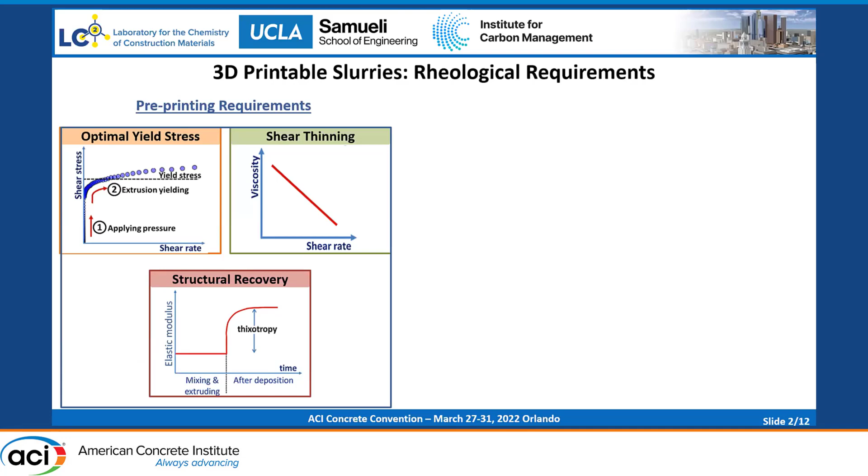So, as you all know, meeting the rheological requirements of a slurry is one of the major challenges in extrusion-based 3D printing. Since most of you are experts in 3D printing, I'm not going into the details of this. Largely, we can categorize the rheological requirements into pre-printing and post-printing rheological requirements. Pre-printing means it should have an optimal yield stress, it should be shear thinning and thixotropic in nature.

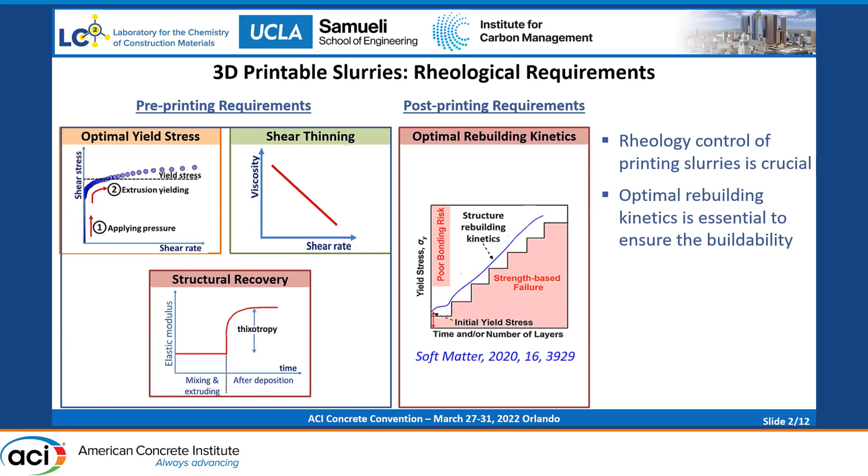When we talk about the post-printing requirements, it is mostly about the post-printing stiffness evolution and how the bottom layers can support the layers that are being printed on top of it. So both this rheological control and the optimal rebuilding kinetics are crucial for a 3D printed structure.

Now, coming to more details of this rebuilding kinetics, this slow fluid to solid transition is the central challenge that we have in concrete 3D printing, and this is what impedes the application of concrete 3D printing for building complex geometries. This limits the printing speed, the print height, the maximum possible overhang, and the print fidelity.

This slow fluid to solid transition greatly restricts the palette of printable geometries, especially the structures with overhang, and limits the achievable architectures. Now, to utilize the opportunities unlocked by 3D printing and by techniques like topology optimization, we need to have slurries with controllable rapid stiffening. When we say rapid stiffening, we're talking about stiffening in terms of seconds or minutes.

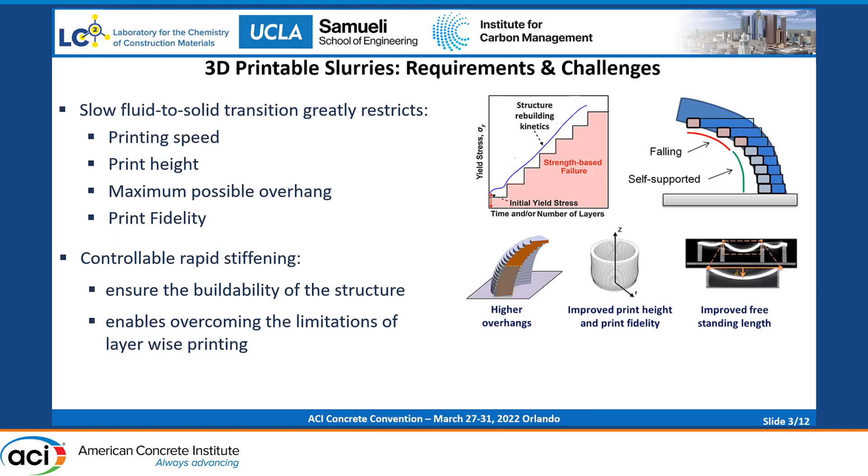So if we have suspensions with controllable rapid stiffening, we'll be able to achieve higher overhangs, improved print height, improved print fidelity, and improved freestanding length. With those kinds of suspensions, we will be able to expand the design and production space that is currently accessible for concrete 3D printing. We'll be able to print lattice structures, stretch-dominated, topology optimized structures, basically structures with high strength to weight ratio.

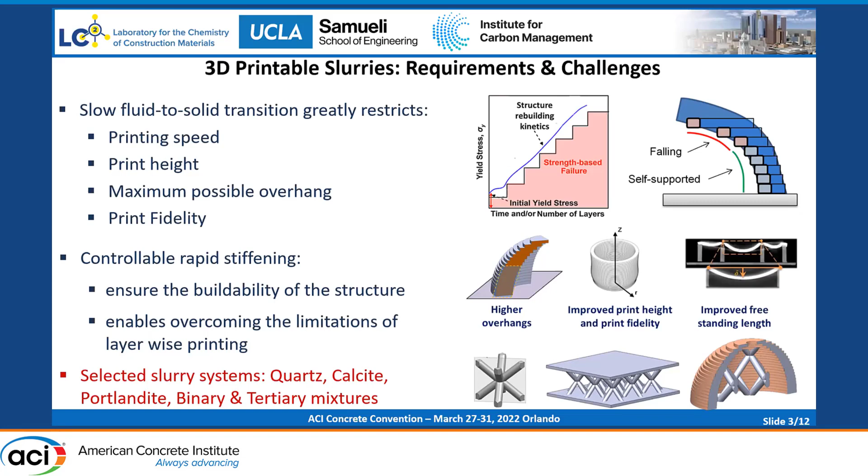So today I'm going to show you how we achieve this controllable rapid stiffening in model mineral suspensions. We demonstrated it on suspensions like quartz, which is an inert suspension, calcite, which is one of the most commonly used structural materials, and portlandite. Portlandite is a material that we selected because it is an example of a high ionic strength and high alkaline suspension. We also demonstrated it for binary and tertiary mixtures of these minerals. But we can extend this approach to any minerals, including ordinary Portland cement.

So how did we do that? First and foremost, we need to have an optimal pre-printing rheology for these suspensions. That means we should have a high solid content and an optimal flowability. What is shown here is the evolution of yield stress as a function of solid volume fraction in the suspension. This is important in suspensions like portlandite. As you can see, when we cross a volume fraction close to 30%, there's a significant increase in the yield stress and the viscosity of the suspensions.

This is basically because portlandite is slightly soluble in water, and because of this, the suspensions have a high pH and high ionic strength, and this ionic strength screens the electrostatic charges. So the portlandite particles are attractive in nature or slightly weakly repulsive. When you put them in water, they get aggregated, and this aggregation limits the maximum volume fraction that we can achieve in these suspensions.

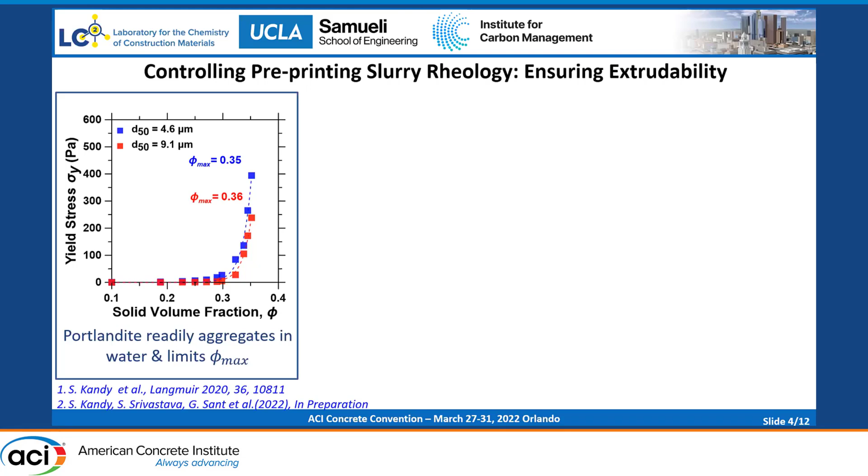So basically, if we use this suspension for printing, we'll have high drying stresses, high porosity, and mechanically weak structures. So having a high solid content and an optimal rheology is crucial. So we need to improve this.

For these kinds of suspensions, where we have high ionic strength and high charge screening behavior, polycarboxylate ether based dispersants are very effective. These dispersants can induce an electrosteric repulsion between the particles, and basically we can mitigate the particle aggregation.

With this, we'll be able to reduce the viscosity of the suspensions. We can go from strongly shear thinning suspensions to an almost Newtonian response by varying the dispersant fraction, and also we'll be able to increase the solid volume fraction in the suspensions from 0.3 to 0.5 without any significant increase in the yield stress or the viscosity.

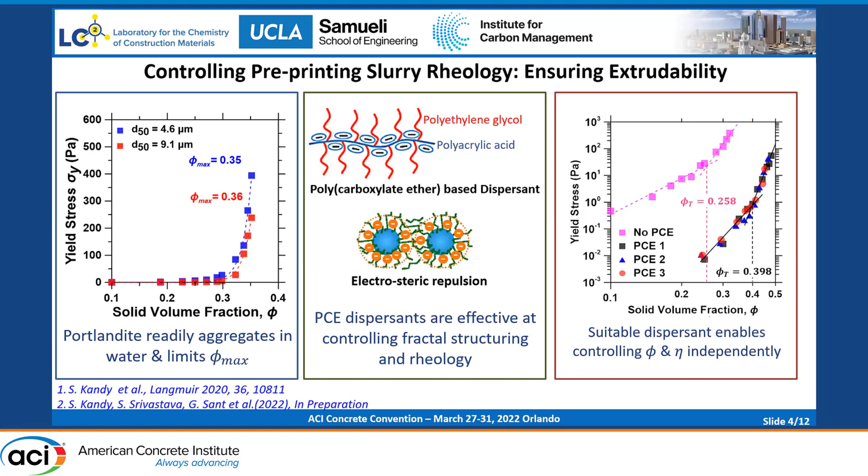So with this suspension, we'll be able to control both the solid volume fraction and the yield stress or viscosity independently. So now we have the suspensions which are meeting all the pre-printing rheological requirements. How do we achieve this rapid stiffening?

In the last talk, we have seen various methods to improve the stiffening kinetics in Portland cement-based slurries. Here, we are talking about rapid stiffening. So exclusively depending on the hydration will be very challenging because hydration kinetics is relatively slow. So the approach we used is incorporating a secondary binder in the suspension, and we can induce rapid stiffening by triggering those secondary binders which are incorporated in the suspension.

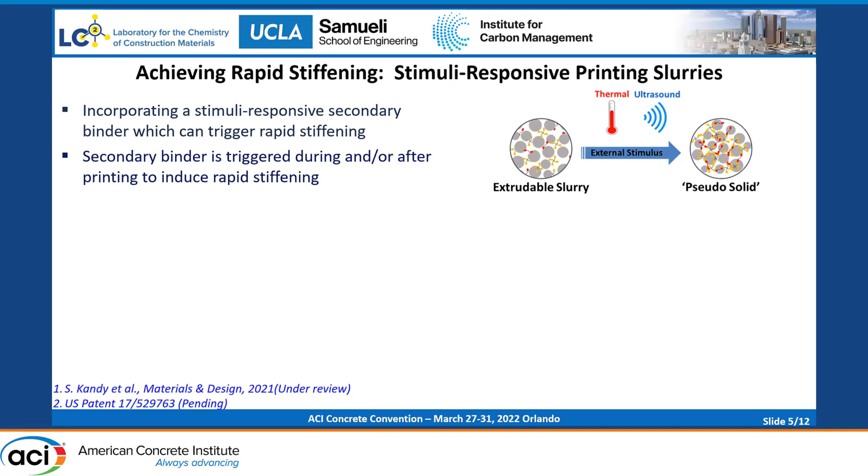So how do we induce this rapid stiffening? We induce this by an external stimulus. External stimulus can be thermal, ultrasound, electrical, or electrochemical. We are mainly focusing on thermal and ultrasound triggers. So for the rest of my talk, I'll be talking about the thermoresponsive suspensions.

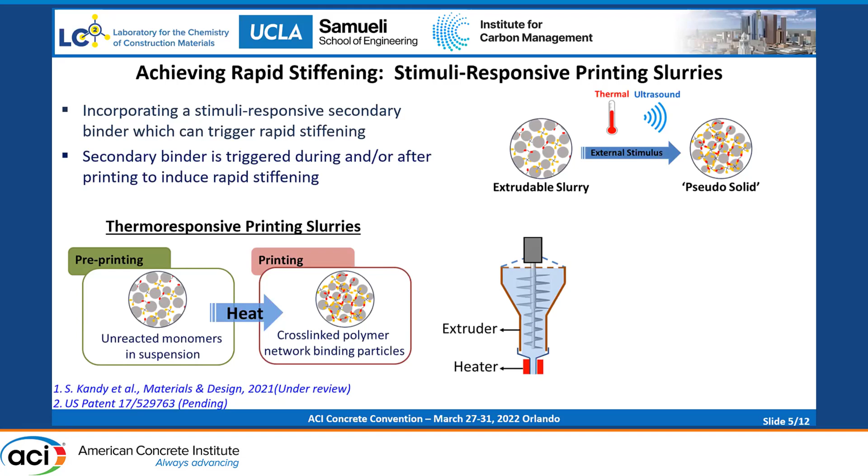We develop thermoresponsive suspensions by incorporating thermosetting resins in the suspension and using heat as the trigger for the rapid stiffening. So when we heat it, these monomers undergo polymerization and induce a gelation in the suspension that induces fluid to solid transition. So we can heat these suspensions in a single stage, either in the nozzle, or in multi-stage in the extruder as well as the heater, or we can heat immediately after depositing the layer.

So what happens is these suspensions remain flowable until they reach the activation temperature. There won't be any significant change in the elastic modulus. But once heated above the activation temperature, the polymerization starts and the polymer network builds up within the suspension matrix. And as the cross-linking proceeds, this rigid polymer network forms around the mineral particles, which induces this rapid fluid to solid transition.

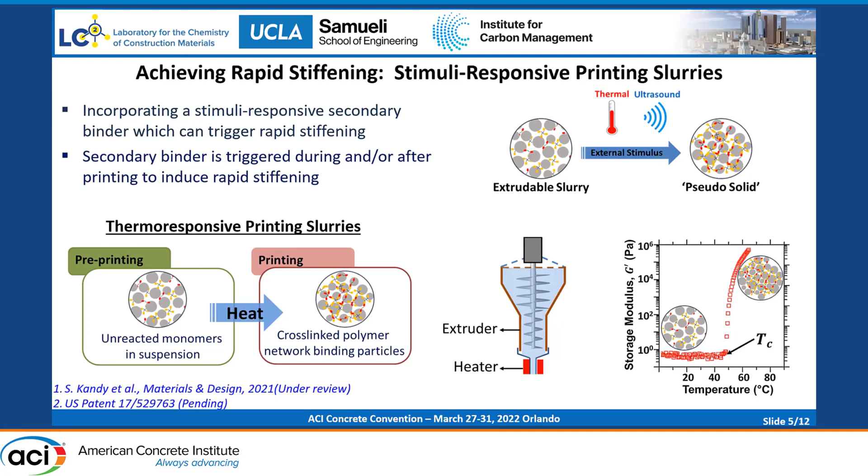Now, the most important part is the selection of these resins and the reaction. The resins that we select should be either soluble or dispersible in water because all the suspensions are water-based. And another most important thing is they should be stable in highly alkaline medium because ultimately we're going to use this in cement-based suspensions. And coming to the reaction kinetics, they should be thermally latent and should have a good induction period.

We don't want these resins to react until we trigger them. And once we trigger it, once it reaches the activation temperature, it should have very rapid reaction kinetics. Only then will we achieve that rapid fluid to solid transition. And the reaction kinetics should not be affected by the alkalinity of the suspending medium.

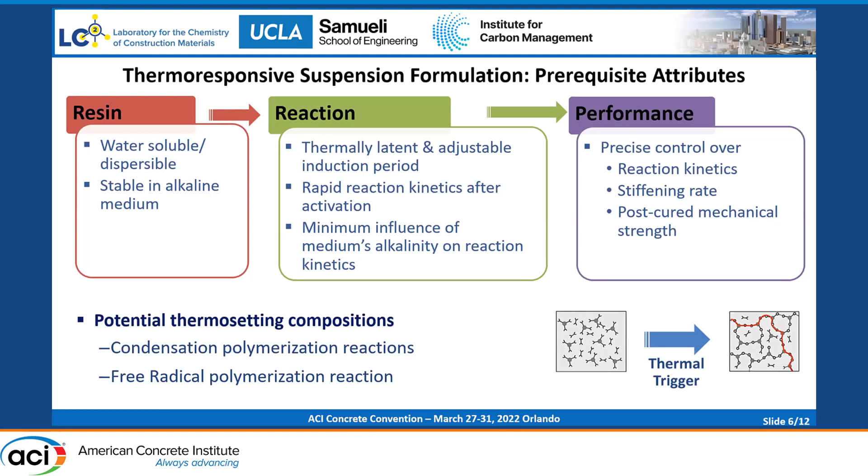And in terms of performance, we should have precise control over the reaction kinetics, the stiffening rate, and the post-cured mechanical strength. So we primarily focused on two reactions: condensation polymerization reactions and free radical reactions, basically using a thermal trigger to induce the gelation within the matrix.

So I'm going into the details of one of the thermoresponsive formulations that we developed, which is based on amine-catalyzed epoxy-thiol click reactions. The reason we chose this reaction is because it has very high reaction kinetics. And once the reaction is initiated, it is a highly auto-accelerated reaction.

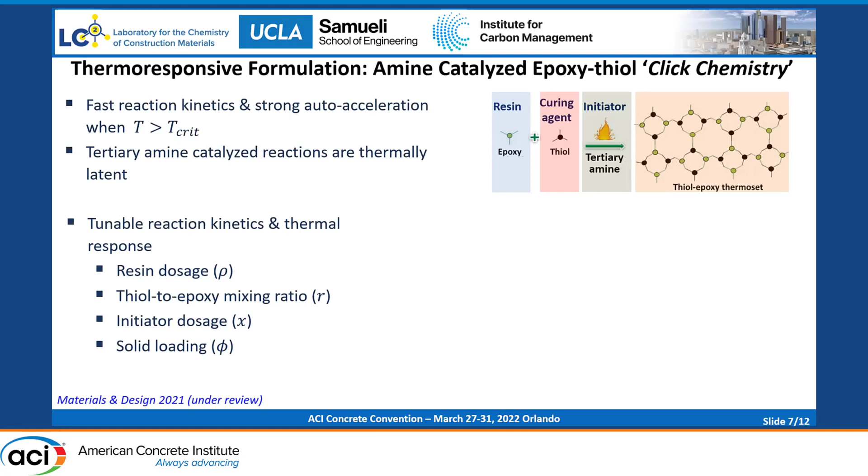So the epoxy is the resin, the thiol hardener is the cross-linking agent here, and tertiary amine is the initiator or the catalyst. Choosing this initiator is very critical because it decides the activation temperature and the reaction kinetics. The biggest advantage of this formulation is it gives us a lot of control over the thermal response and the mechanical strength of the printed or cured composite. The controls are the resin dosage, thiol to epoxy mixing ratio, the initiator dosage, and the solid loading.

So I will show you one example how we can play with these formulation parameters. This shows a DSC thermogram of epoxy-thiol mixtures. Basically, you see two thermograms here, which correspond to two curing reactions. One is the epoxy-thiol reaction, which is happening at the lower temperature here. And another one is the epoxy homopolymerization if you have any excess epoxy in the formulation.

So this particular epoxy-thiol reaction is what controls the low temperature rapid stiffening, and this second reaction, the homopolymerization, basically provides the mechanical strength. So by controlling this epoxy to thiol mixing ratio, you will be able to either get a suspension which has a very high stiffening response, or by using some excess epoxy, you can compromise on the thermoresponsiveness, but you can get a good mechanical strength.

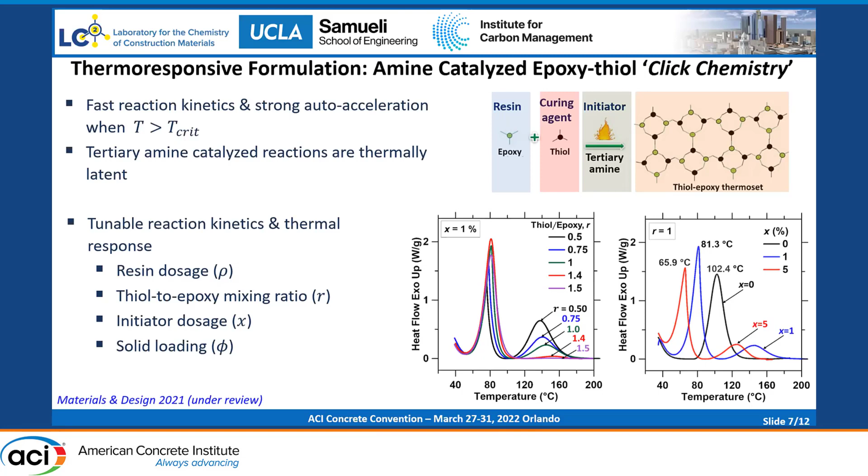And another example of this formulation control: by increasing the amount of initiator in the mixture, we can bring down the activation temperature to whatever temperature we want, something close to 60 or 50 degrees Celsius.

Coming to some results on these mineral suspensions, what you see here is a one-to-one correspondence between the progress of the curing reaction and the stiffening, between the stiffness evolution that we measured using a rheometer and the cure conversion obtained from the DSC analysis. So as you can see, we get a rapid increase in the elastic modulus once we achieve a threshold cure conversion within the resin.

So what is shown here is the real thermoresponsiveness for different suspensions: quartz, calcite, and a mixture of quartz and calcite. As you can see, there is essentially no increase in modulus until we reach the activation temperature, and beyond that we see a very rapid increase in the modulus. And there is a stark contrast between the suspension with and without resin. Without resin, there is no noticeable change in the stiffness.

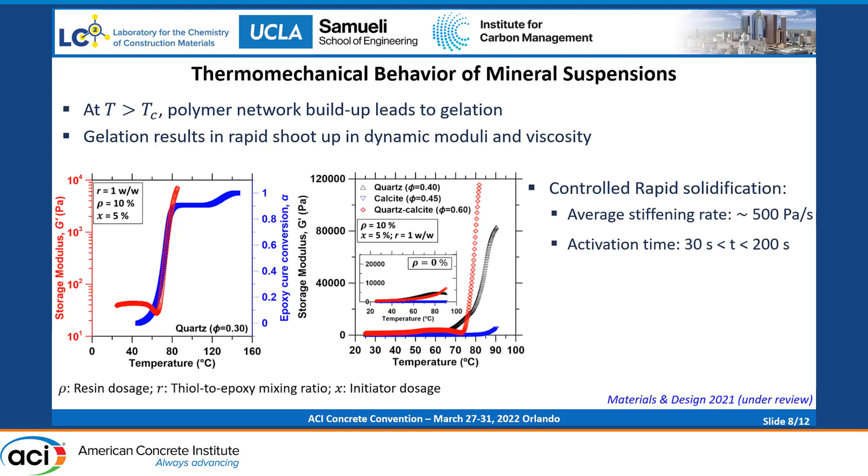And even though, depending on the minerals and the volume fraction, we can have differences in the thermoresponsiveness, we still get an average stiffening rate of 500 Pascal per second, and the activation time can be as low as 30 seconds. A few more examples on the control that we have on the thermoresponsiveness.

What is shown here is the effect of solid volume fraction and the epoxy-thiol mixing ratio. By using more and more solid content, we'll be able to improve the flexural strength of the suspension. That is obvious. What is interesting here is the effect of this epoxy to thiol mixing ratio. By using a mixture with excess epoxy, we'll get a higher mechanical strength, but we need to compromise on the strain capacity of these suspension composites. But if we have a more or less stoichiometric ratio of epoxy and thiol, we may be compromising on the flexural strength, but we get a good strain capacity.

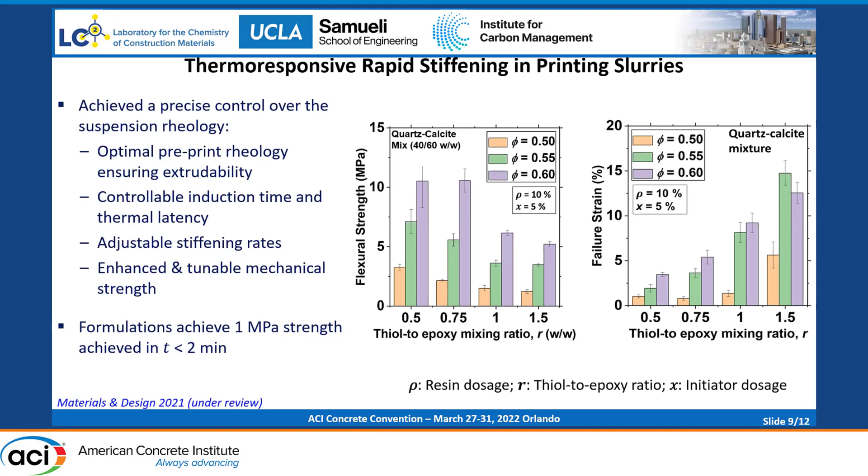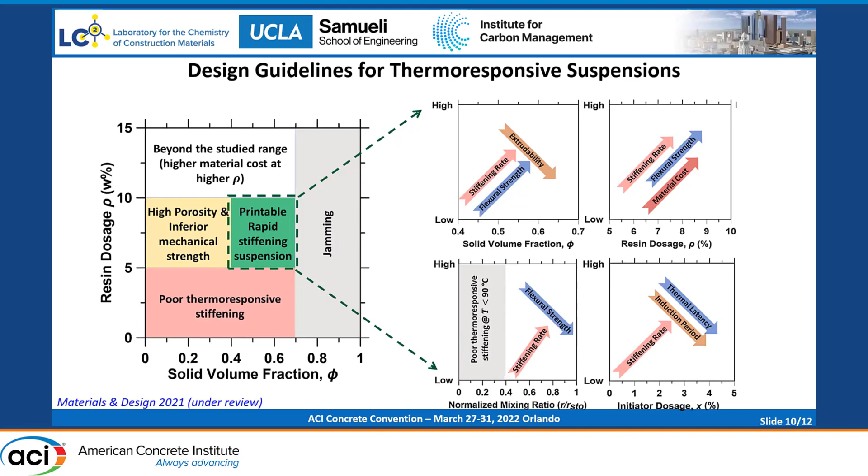So to conclude, we came up with design guidelines for these suspensions: within the printable domain of this formulation, how these various parameters influence the thermoresponsiveness. We have solid volume fraction, resin dosage, the mixing ratio, and initiator dosage. So depending upon the print geometry and the kind of stiffness we want, we can play around with these formulation parameters and control the stiffening response of these suspensions.

With that, I conclude here. This is a facile pathway to overcome the limitations of current conventional 3D printing, where we can extend this approach to any structural material, and which is scalable and economical. And this process has precise control of the formulation parameters to adjust the rheological and stiffening requirements that we want. Before we conclude, we are now working on a radical polymerization-based formulation where we could achieve almost 4 orders of magnitude enhancement in the modulus within less than 30 seconds.